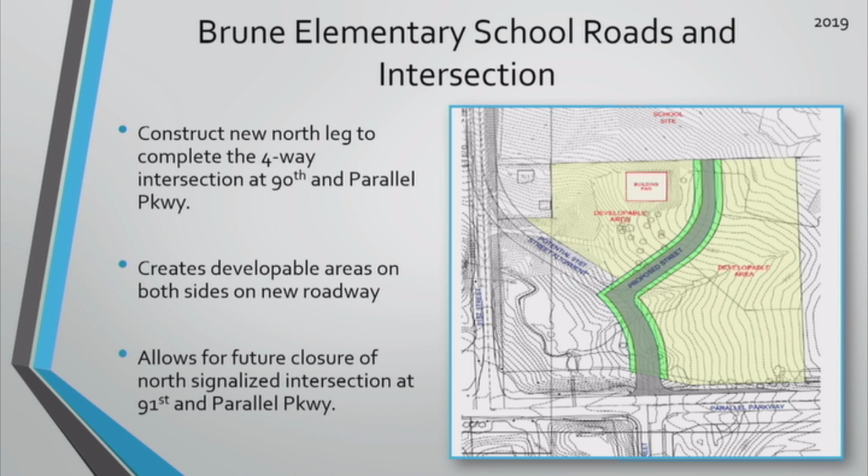Another thing you'll see in the 2019 budget is a large UG portion of this project, which is the I-70 and Turner Diagonal interchange reconstruction. There's a lot of moving pieces to this — we actually had a conversation with senators today about how we can push this forward. Basically this would be taking the current cloverleaf type design and turning it into a diverging diamond.

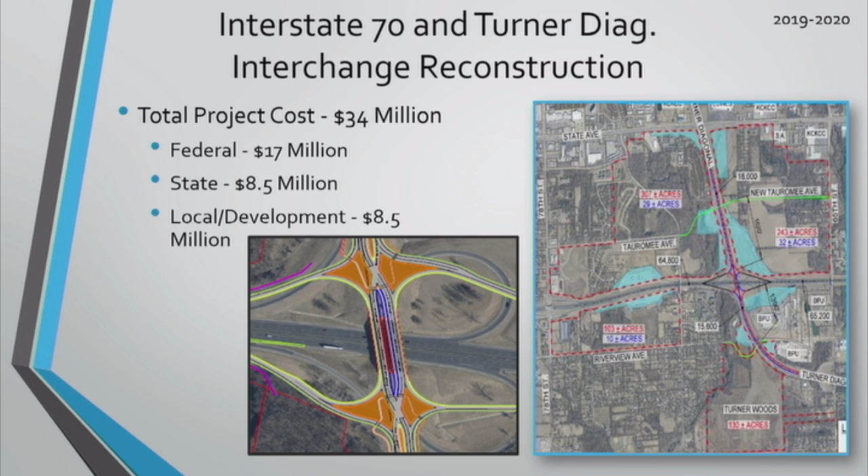This does a lot for our community because it opens up a lot of developable land along this corridor, which would be a major corridor improvement along with what was already done at Turner Diagonal and the Riverview Bridge — how it was removed — and we've changed the speeds throughout the area, making it more appealing for development.

Leavenworth Road Phase 2 — we've gone over this one several times, so we won't go over it too much other than to say we're currently in design and working with BPU already to try and get their stuff coordinated, so we're getting our stuff moved out of the way before the project kicks off in late 2020 and early 2021.

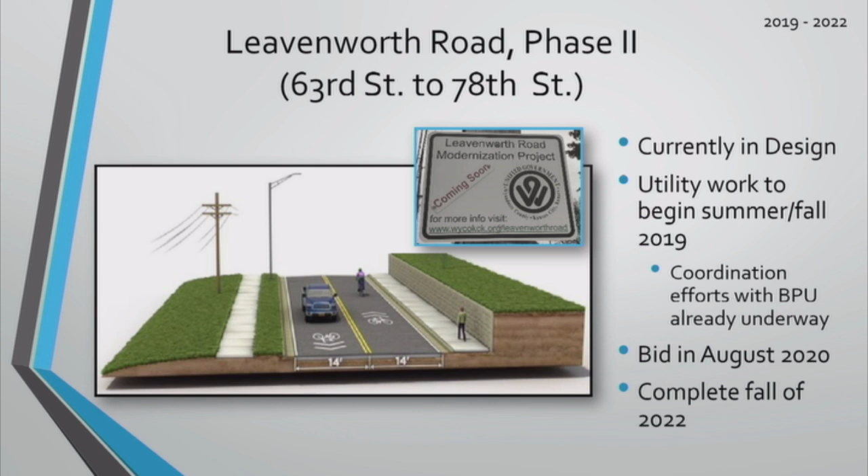Question on that — can you give us the breakdown, federal, state, local?

Off the top of my head, I don't know, since we're still in design and haven't bid it out exact dollar-wise. I want to say we're thinking like $7 million is our piece — I want to say it's close.

Is it about 50-50 on this part of it? Yeah, most of the federal projects end up being about 50-50, even though the match is 80-20. But by the time you do design and everything else and lump it in there, it usually ends up being about 50-50. So ultimately you're looking at about 13 to 14 million for the whole stretch of the project, with our portion about 7-ish. Yeah, okay, thanks.

We've got two wastewater projects that we've mentioned several times, but they're both so large that they encompass several years and are phased out, so we wanted to mention them again so everybody's still aware. Both of these will probably come back to you in individual sessions as they really kick off, so you can have more information on them.

The Wolcott Treatment Plant, an update for everybody. We have currently accepted a bunch of construction manager at-risk proposals, and we're working with them to figure out which one we're going to go with. We're really trying to push that one forward in an effective manner that would get us a good product and keep us on that budgetary line, which is what a construction manager at-risk process does.

The Kaw Point Biosolids project is improvements to our current Kaw Point facility to handle our solids, and not only ours, but other adjacent cities' solids as well. Jeff will update you in our next discussion about an agreement with KCMO on that.

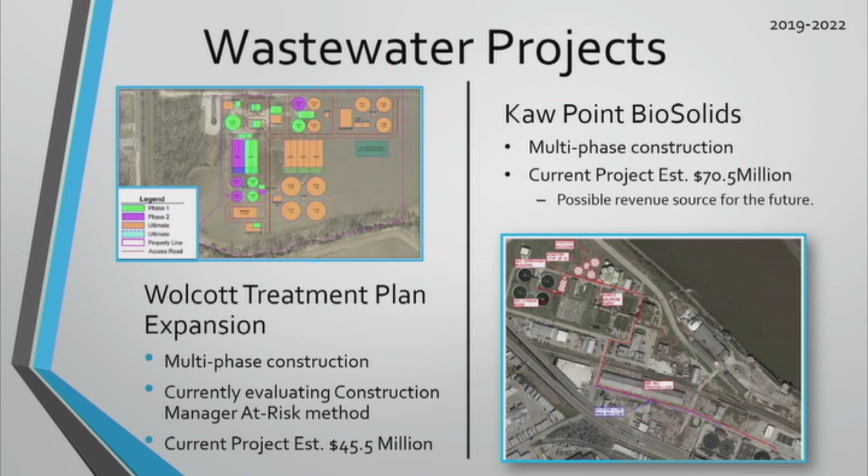The Minnesota Avenue improvements, this is the next phase of what we've currently done over the past several years between 7th and 8th. This is moving between 6th and 7th. This is mainly streetscape work, improving some of the aesthetics around there and some of the parking. You may have noticed some of the planters already removed on the far east end, that was due to a BPU water line issue that had to get fixed. So we will be putting appropriate plantings back in those areas that are easy to maintain and still hold the look we're going for as a true downtown type corridor.

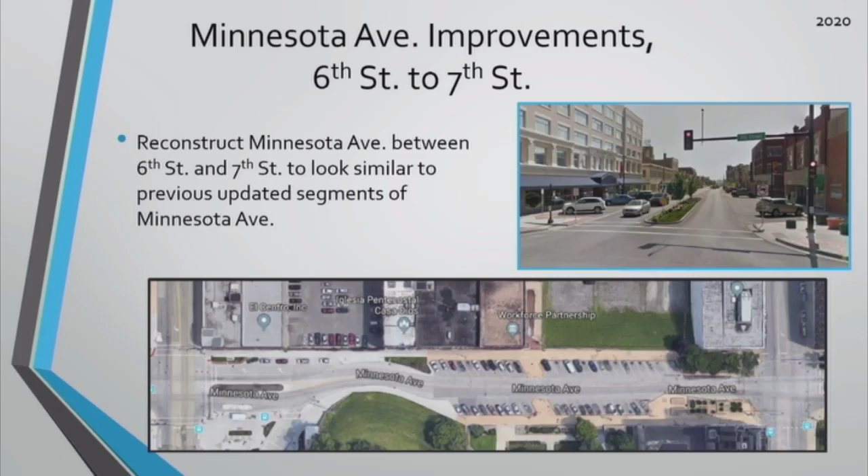Our final phase of the Holliday Drive Bridge replacements, this will be phase 4, which is the large box structure right outside the Water One plant. There have been several, not really issues, but several large pieces and large players with the adjacency to Water One and a couple of the utilities that are really close to the north side of the road, so we're really focusing on that. We're looking at doing an alternate delivery type construction method with this, like a design build or another method similar to that, that we can discuss more at a different time whenever we get to it. But this one isn't really slated to begin construction until late 2020.

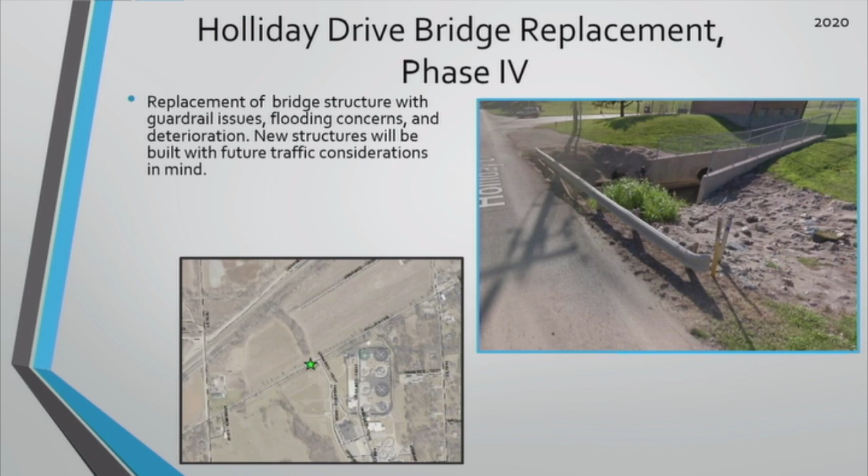131st and Leavenworth Road intersection. This is an intersection redesign that is in conjunction with the new school build out on the southeast corner of 131st and Leavenworth Road. The current layout we're looking at is one that's really similar to 115th and Leavenworth Road, so designated turn lanes, designated through lanes, storm drainage enhancements, and sidewalk connectability for future improvements, because there isn't any sidewalk out in that area now, but if we're building something, we'll put it in so it's there.

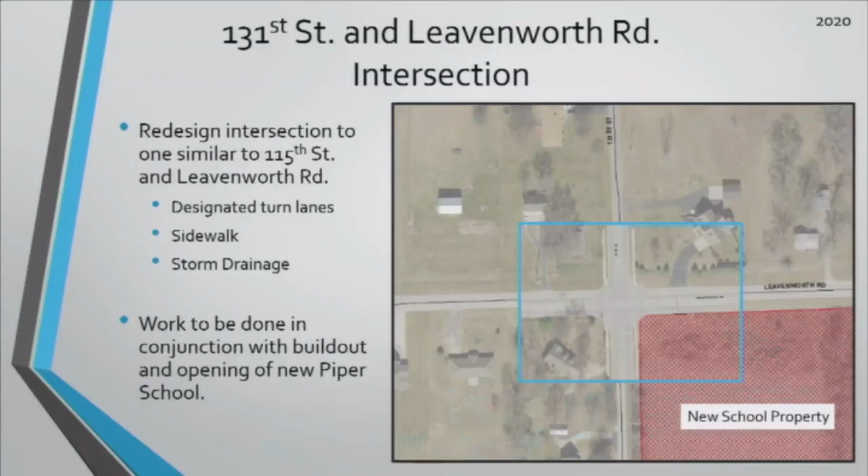In 2020, we're also looking to make some fire alarm adjustments to the courthouse. Our current system, as well as some new systems we're going to be putting in, have a non-audible component to meet ADA compliance, so everybody's notified and not just people that have hearing capabilities. We're also currently working with sheriff and PD to determine if there are other security or safety needs on the justice side while we're going to be there, to get it all wrapped up together.

We also have in the budget for 2020 and 2022 some budgeted monies for new fire stations, $3 million in 2020 and $3.5 million in 2022. Currently, there hasn't been any discussion about what sites we could potentially look at, but based on the current estimates for the new Piper Fire Station we're looking at, there could be some budget adjustments in the future depending on what dollars we come in at and depending on if the template we come up with is easily replicable fairly simply. So that'll be something that gets brought back before you in a future update when it gets time.

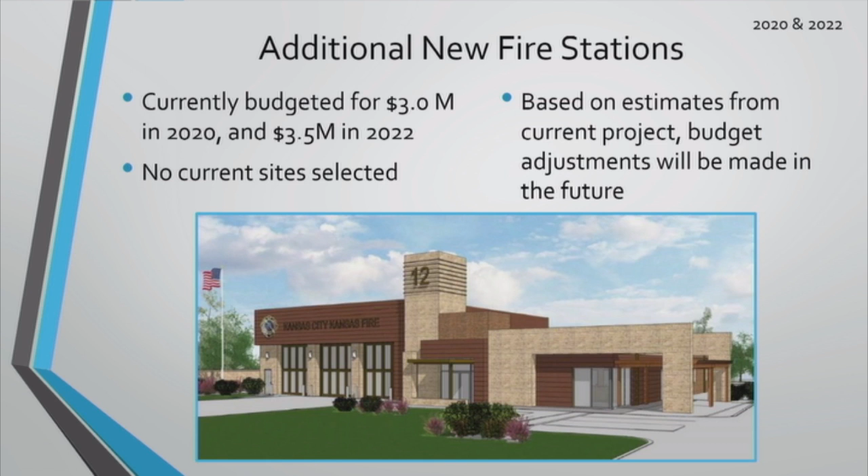In 2021, we've got our next phase of Safe Routes to School, which is creating sidewalk connectability between Northwest Middle School and Caruthers Elementary, just north of 18th Street, around Parallel Parkway and 18th Street. We're looking at sidewalks connecting the two and throughout the neighborhood, and also some possible signal improvements at 18th Street and Parallel Parkway if the funding levels cooperate, or if the dollar values of the project cooperate.

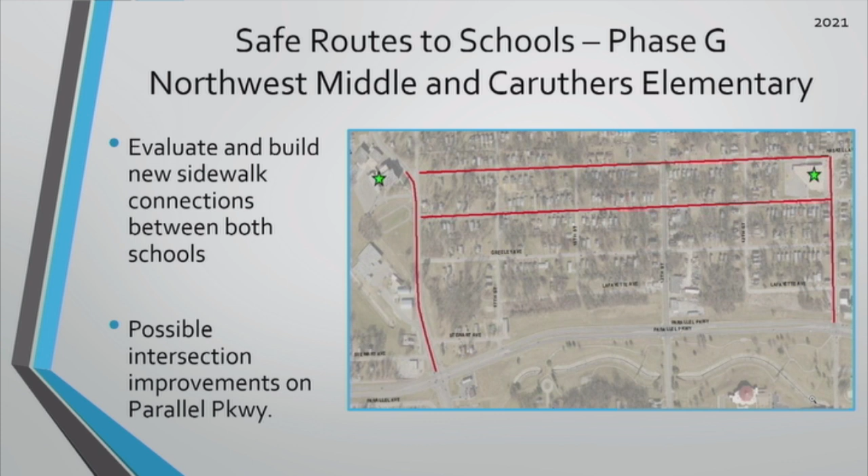Hutton and Leavenworth Road intersection reconstruction. This is a multi-phase project we've talked about with you in the past. Phase 1 will be the removal of the large hill on the east side of the project, as well as some lane marking improvements going back east towards I-435, and then an actual intersection redesign once we figure out what's going to go there and what kind of development might spur in the area and things like that.

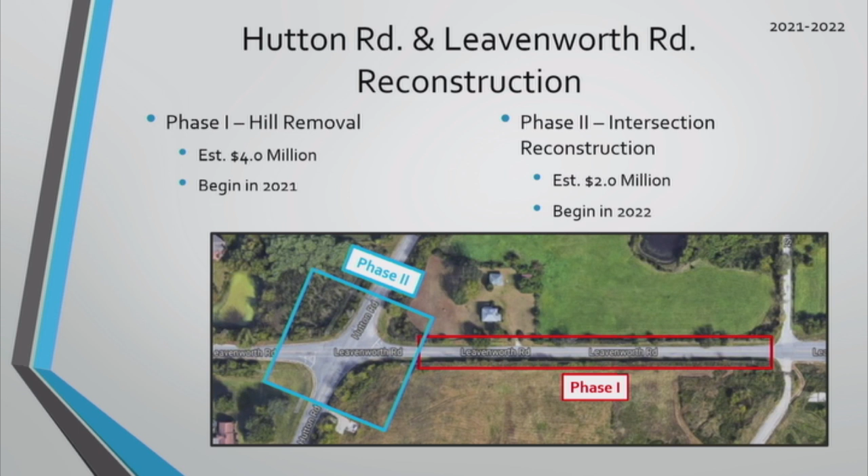Well, because in addition to the fire station and the park, we're getting a couple hundred units right there of housing, and I just wonder about increased traffic and whether 4 lanes would be good.

As Troy mentioned, there's several design options for it. One of them is a 4-lane section, but we are looking at that as the ultimate build out. Whether we build that initially depends on traffic concerns, we might not do that, but we are buying the right of way, grading everything back, so it'd be easy to add those extra lanes if needed. Okay, thank you.

Next big project that we've got coming up for City Hall is some stabilization in the lower areas of City Hall. We currently have an architect and engineer on board doing their initial study and making some immediate stabilization recommendations. Those repairs will begin in 2019.

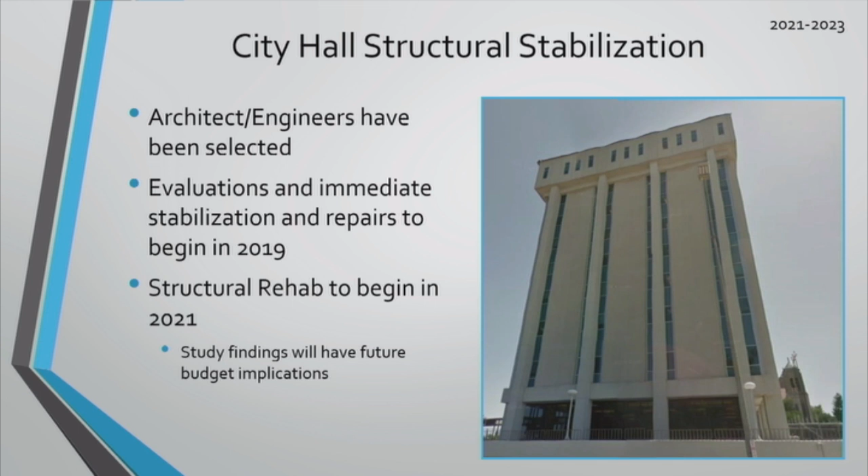The full study itself will give us some other details as we move forward, and we'll be able to come back with some other options and how much those could potentially cost. Currently we're budgeted at about $10 million over the next 5 years. So that's just something to keep in mind as we move forward, but we'll be back to discuss that at length when the time comes.

One of the annual projects that's semi-new in this year's budget is our green infrastructure improvements. As everybody's aware, we're under a consent decree with the EPA to clean up our stormwater quality, and one of the big ways you can do that is creating green infrastructure, rain gardens, catch basins, things that hold water and allow it to absorb naturally into the ground as opposed to just flowing and reaching some of our combined sewers.

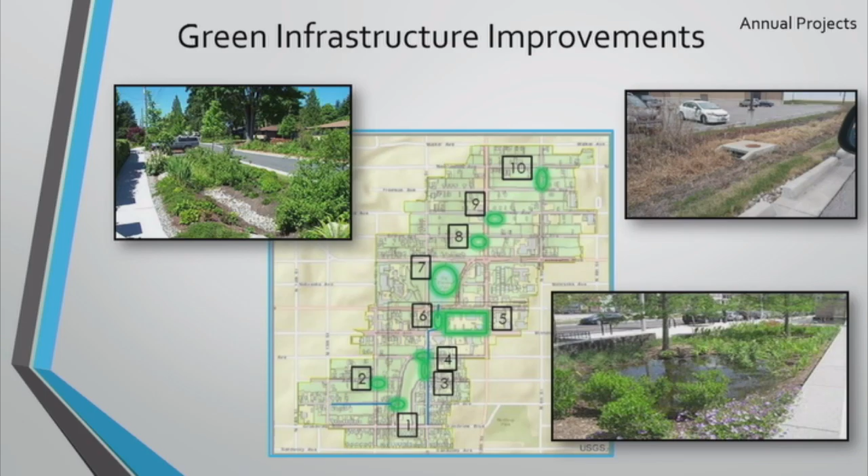So what we've kind of focused on is a corridor area stemming from just to our west a little bit at the 8th Street Park, moving all the way down through Big 11 Lake and ultimately ending up towards Jersey Creek. But there are several locations throughout that we'll be bringing forward in the next few years with real concrete plans.

Next, we wanted to highlight a couple things that currently aren't in your budget, but they're big pieces for us that we will be bringing up into the budget in this next budget cycle, so you'll see them coming up. We wanted to give you a little heads up and a little detail about what they really are.

The first one we've kind of talked about a little bit is the Kaw River levee raise project. This is part of the 7 levee studies that we're doing, or that have been completed. This is a joint operation between us, KCMO, the Kaw Valley Drainage District, and the Army Corps of Engineers. Very huge, massive project, basically raising the height of our current levees.

There are several things that need to happen along with this. In 2019 you're going to start seeing pump station improvements to handle increased flow capacity. In 2019-2020 you're really going to see some property acquisition, so there's nothing really to see there, but you might hear it being talked about. And then in 2020 to 2023 is when the raise is actually going to happen. Overall, this is about a $450 million project.

There's a very large portion of this, if not all, that's going to be federally funded. So it's a large number, but it's not a big impact on us. Jeff can elaborate on that at a future date once we get really into this, but we're still working out details with the government.

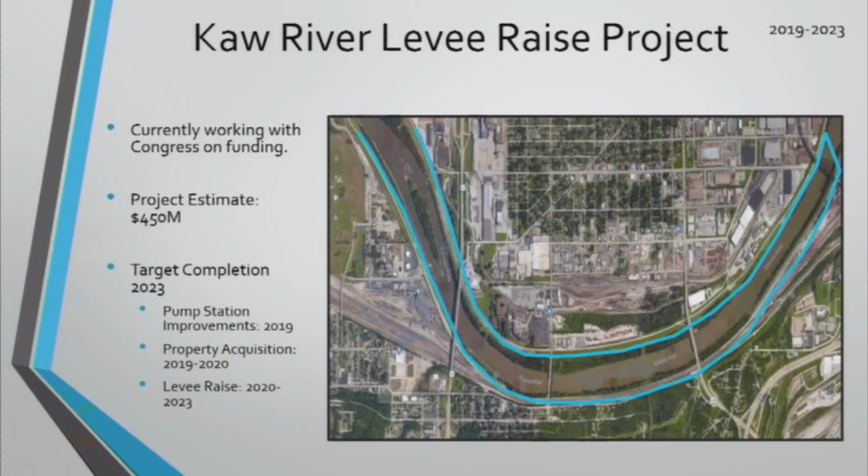The next one is actually a grant application that was submitted and didn't get turned back to us until right after this last budget cycle, as part of KDOT's CCLIP program, which is the former program that deals with cities that maintain state roads. This one is for 69 Highway, right outside of our offices here. We've looked at this intersection several times for MARC grants and things, and it just didn't receive the funding for it, but luckily we got some funding this time.

So at 7th and Central, everybody knows that tight intersection with the bank on the corner. We're looking at improving the turning radiuses and turning movements, some signal improvements, sidewalk connectivity. As you can see from the picture, there's a lot of legs in close proximity to this intersection that create turning hazards, sight distance issues with the hill coming to the north, and then having people queuing at the stop sign or the stoplight here. So we're looking at potentially closing some of those or realigning things to make it a more functional intersection and allow traffic to flow better.

Another element of this is possibly a road diet that will, as we mentioned with sidewalk, allow walkability and bikeability through the area. So we'll be taking that into consideration as we do our design.

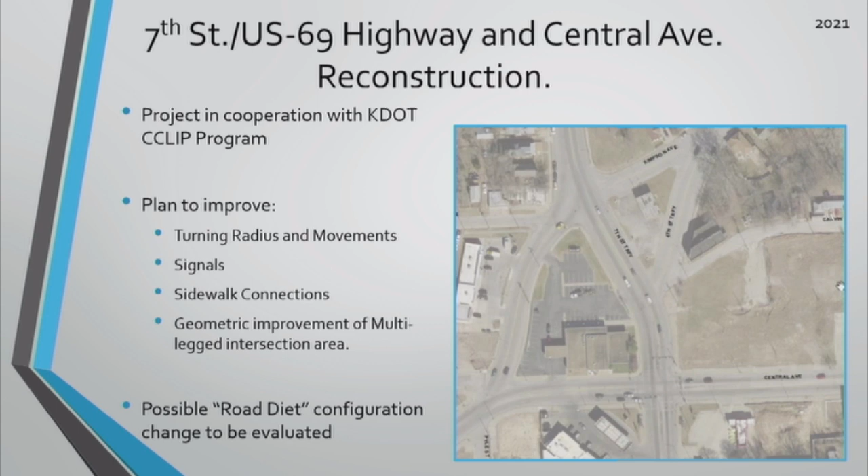Commissioner Philbrook: So between I-70 and 7 Highway, that little section on Central, there's a speedway right now. Well, I mean, I don't want to die walking to slaps, what can I say? And people do have a tendency to really haul it through there as they're coming up. Is there any plans to quiet that down a little bit in this?

Not as a part of this. When we redid that portion of Central Avenue, we did try to do a couple traffic calming things by creating some bulb outs through there and allowing parking kind of through there. As you've noticed, it didn't necessarily deter people how we had hoped. I know there are discussions about other possible options, but we haven't hashed any of those out just yet. But it is something that's on our radar.

Please hash it out. Yeah, no, because I've been getting feedback from quite a few of the business people when they go down there, and we're creating more and more small businesses in that area, and so we want people to feel safe when they spend their money with us. Thank you. We will definitely keep kicking the tires on that one.

Another big piece that could be seen in the next few years is our stormwater master plan and rate study that everybody's been briefed on in prior presentations and other meetings. Basically this is to help us alleviate some of the major stormwater issues that we're having in the city by possibly taking some of the rate funded money and putting it solely towards a different type of project scope. Currently in phase 1, which is really the next 10 years or so, we're focusing on the highlighted drainage districts that are up here, and within each drainage district there'll be projects that come out of them and they'll be ranked according to some criteria that we've set up. So we'll have more concrete projects coming forward as far as being able to say exactly what we're doing, but this is going to be something you'll start seeing more of.

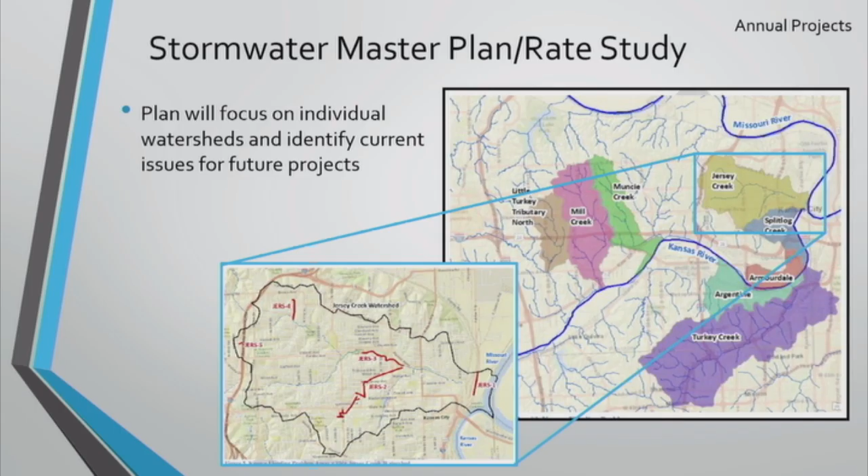Could we have the dates, times, places? I wouldn't necessarily want to go to all those meetings, but I might want to go to 1 or 2. Yeah, we just got those set up late last week, right before Thanksgiving, so we'll send out a notification of when those dates are. We'll have them back together. Okay.

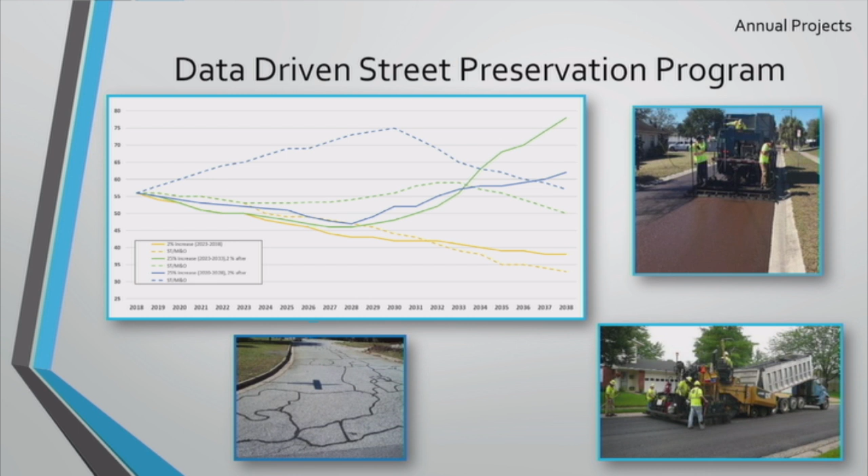Our data-driven street preservation program, which we just went over at length, so I won't go over this slide with you anymore, but it is another big piece that is going to see a lot of emphasis in our implementation of the budget and how we request money from you all moving forward.

Anybody have any questions about that? Commissioner Johnson: Thank you. The Safe Routes to School, part of that is funded through Mid-America Regional Council.

Yes, correct. 2021, is that the year? I thought it was 2019, 2020. Am I wrong on that? The way it's phased out is the major construction won't really happen until 2021. We've got some budgetary dollars associated with design, but you won't see a lot of the work done until 2021.

What's the estimated cost on that? We're still in early estimations on that. The dollar value we got from Mid-America Regional Council was about 500,000, if I remember right. Is that the one we got more on? It's more, I think. The total project cost, and I'm guessing here based off memory from months ago, but I think it was like 1.2 or 1.3 million total. Oh yeah, I would expect it would be that much plus some.

And I think we ended up getting two separate grants from MARC for that. One was the 500,000 that Brandon was talking about, which is what we typically get for the Safe Routes project. But we also got a separate one as well to merge together. Very good, thank you.

Okay, other questions or comments for this item? Well, thank you very much. And we'll move right into our last item on this agenda. We have Jeff Fisher. He's going to bring us an update on the Unified Government Kansas City, Missouri Cooperative Agreement for Long-Term Biosolids Treatment. Thank you.

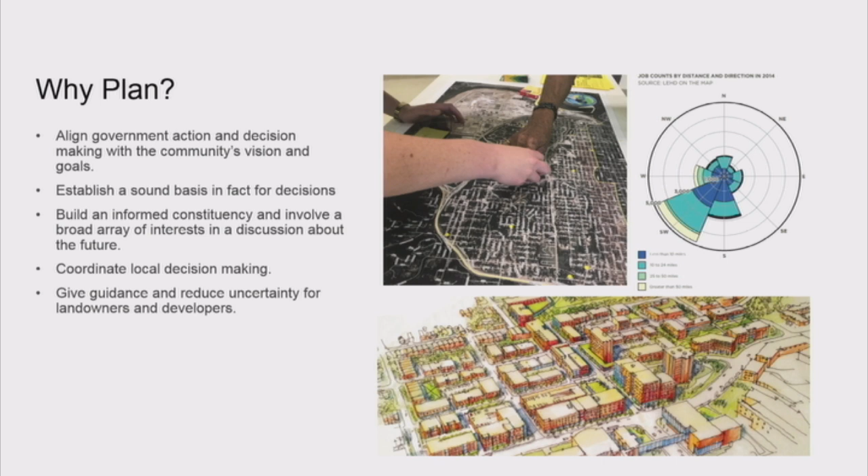I really think planning can help generate economic development because it reduces uncertainty. So what we're doing now, this is our citywide master plan, and I just wanted to point out that even when we did the citywide master plan, we had several area plans, with the Piper plan, the downtown plan, Armourdale, and Rosedale.

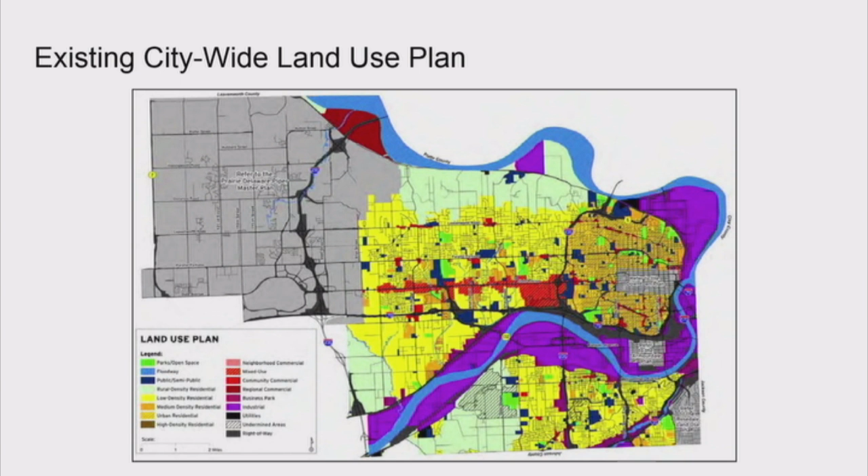We are just completing the Northeast master plan, and then next year we'll be starting on the central area plan. So we're at a point now where we have more area plans than we have citywide master plan. I want to make sure that as we continue to do area plans, and I think that's the right approach, that we aren't painting ourselves into a corner.

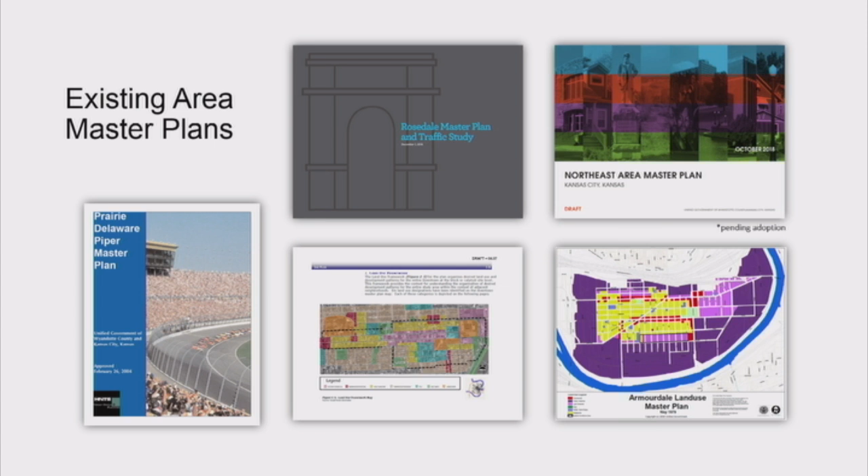Another issue is we have all these great plans, but they're all a little bit different in how they're organized. I think consolidating the format and making sure we're making them very consistent can help the usability of these plans. And then we also have other plans that either address corridors or specific issues that kind of overlap, so it's difficult to know sometimes which plan to refer to. I think this can help clear that up as well.

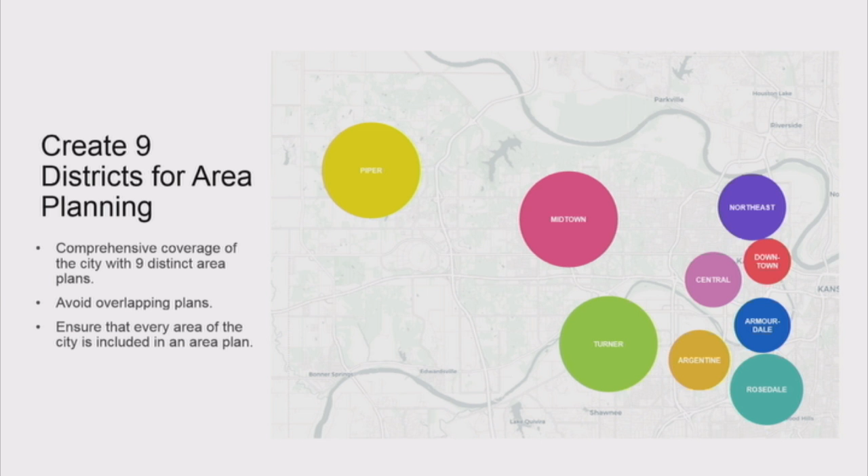So the proposal is that we create 9 districts for area planning. I've shown these as bubbles on the map here. We've done some work thinking about where the exact boundaries are, but for now I just wanted to present this as bubbles. So this would be 9 areas, and then a citywide update that we would do on a rotating basis, allowing us to touch each area every 5 years.

If we use a consistent methodology, outline, and formatting, we're not reinventing the wheel each time, which allows us to do it more efficiently. I think we can use the staff that we have. We have a lot of talented people that work for the UG, and involve more of the departments, which we're already doing with our steering committees, but I think we can do more of this. That'll allow us to be more efficient as well.

So how this could work is that right now we're getting started on the central area plan, and we're anticipating that would be completed in 2019 along with the zoning code update. And then we could start doing one of these plans, having them overlap a little bit so that we are starting one as we're completing the next one, getting 2 done each year.

I think another advantage of this is that it would align with the CMIP budget, because right now we're looking at long-term visions, which we'd still be doing with these plans, but we would know how much money we have in the next 5 years to actually implement, so we can talk about the real steps we're going to take in the next 5 years to get to the long-term vision.

I would just add that sometimes when you look at the whole master plan, you ask how much is this going to cost. Some of it's visionary, it's not all going to be our money, but with this type of approach, we can align that to the CMIP, and say these are things we're going to make CMIP requests for in this 5-year period, and they may or may not all be funded. You'll have direct input from the community on each one of these on a rotating basis for where they want to be over 5 years.